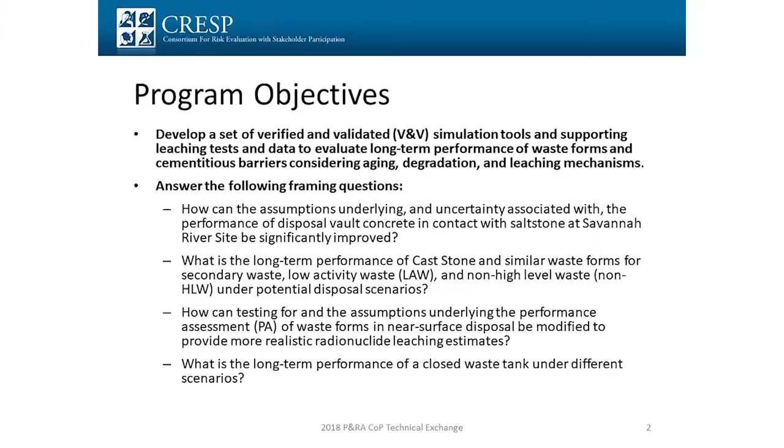How can you test for and look at the underlying assumptions for PAs associated with waste forms in general for near surface disposal? And how can you make those release estimates more accurate? We've also taken a look at how you assess the closed waste tank and its performance over time under different scenarios. So we tried to frame it that way.

We've had a number of applications we've looked at over the years: the Hanford site, single shell tank waste integrity, Waste Management Area C, which was the first one they've pretty much retrieved the waste from, still working on one tank. And then the next one is AAX, so we're looking at that.

That will be more of a PA maintenance sort of idea, that and the IDF, which is under review for its performance assessment. Looking at how you characterize the source term for cast stone, selected for secondary waste at Hanford, also looking at it for low activity waste and non-high level waste. With the reinterpretation, you'll see the phrase non-high level waste, and that's related to the reinterpretation of high level waste and however that goes forward.

In situ grouting, dry storage of cesium and strontium capsules, we're looking at that in terms of gamma effects. At Savannah River, I mentioned the ongoing program with Kent Rosenberger looking at salt stone, so high salt waste in contact with the vault. How do you look at that as a PA maintenance, a special analysis sort of idea?

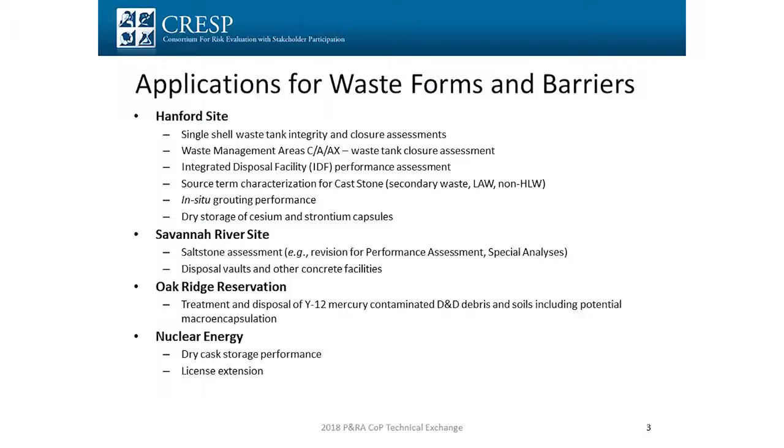So major activities range from the experimental to the modeling. I tend to do more of the modeling stuff, while David and others do more of the experimental.

We are looking at evaluating the impacts of oxidation and carbonation on these cementitious waste forms and how they perform over time, looking at the leaching chemistry, density, and saturation.

If you have something like a high salt waste, typically the way you'd measure porosity doesn't work because when you add water, the salts dissolve and you can't do porosity that way. So you have to approach it differently, and we've done a lot of work on that.

David had mentioned the work applying the LEAF methods to low activity waste glass. I won't touch on that today since he covered it well yesterday. And for things like dry cask storage, we look at the effect of long-term high gamma radiation on those materials.

On the modeling side, which is what I do more of, we're looking at how we close the software quality assurance gap that came up yesterday. Our methods grew out of a research environment, but when we apply these things to DOE work, we have to be consistent with 414-1D and NQA1, so we're working towards that.

As David mentioned, we've got the pH dependence models, 1313 and 1315. These models are already in SW 846, so they're being used actively for regulatory purposes. But how do we make sure our software quality assurance is consistent with DOE regulations?

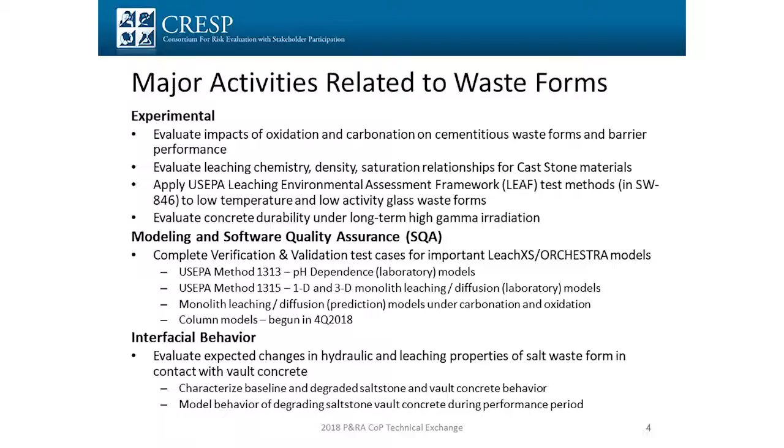Also, there's things like high salt waste at Savannah River in contact with vault concrete. People have done experiments where, over several years, these things were put in contact, and you're supposed to see sulfate attack, but you don't see it. So we're looking more at that interface and the effects of conditions on whether you actually get sulfate attack within the time frames we care about, as an ongoing program with Kent.

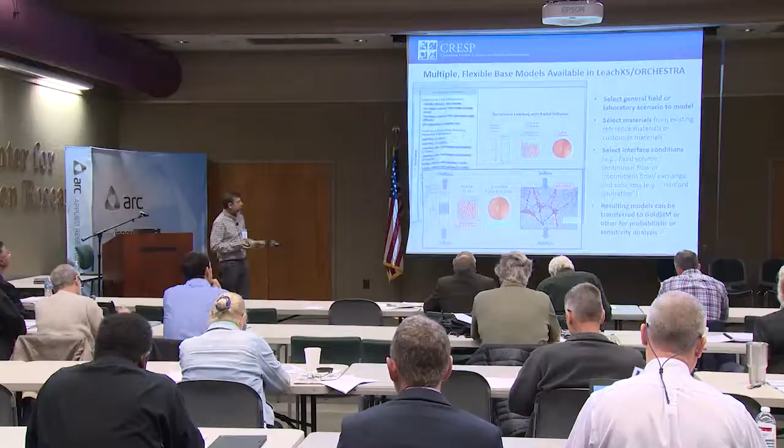So we have a series of models to describe the same test methods David talked about yesterday: 1313, which is pH dependence, and 1315, which is mass transport. You can change your field conditions, laboratory setting, and different materials. We've looked at several thousand materials in a database called LeachXS.

There's also an integrated geochemical model called Orchestra that I'll talk more about, which you can use to predict the same things you're seeing experimentally, changing the interface conditions and flow conditions.

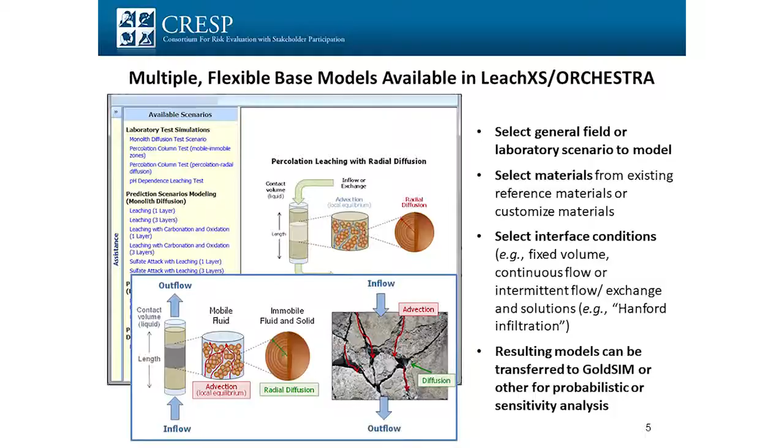We've done some work under what used to be called the Cementitious Barriers Partnership, where we transferred these models to GoldSim. Our students tend to use MATLAB more since they're more familiar with it, but we've used both MATLAB as a wrapper around these things for probabilistic work, as well as GoldSim.

In terms of the SQA, this has been painful—it's what I've been doing the last two years. We're making our models, test cases, and SQA consistent with NQA1 and 414-1D, the DOE quality assurance order. We've progressed from very simple calculations with analytical solutions all the way to code-to-code verifications or checks with things like PHREEQC.

There's a number of international benchmarking studies our codes have been compared to. This one, the reactive transport study, is looking at boom clay in Belgium for disposing of radioactive waste, and that's the same calculation we're using as one of our benchmarking studies and test cases.

We've also compared things to laboratory and field results, because we also talked to the NRC, and they asked what this means in reality. So we've tried to do a lot of work on that.

I did a case a few years back looking at the C107 dome core from Hanford, buried 65 years under 3 meters of dirt. They took a dome core, and I was able to predict—not calibrate, but predict—the level of carbonation in that dome, and it was very consistent with what they actually saw experimentally, so that was nice.

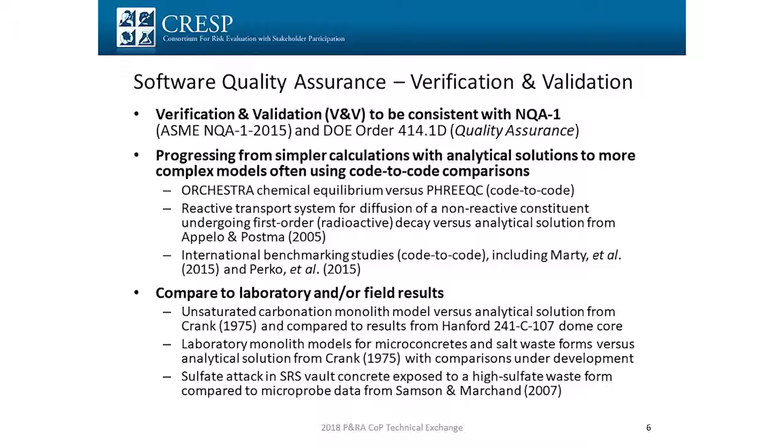We've done a lot of work looking at the monolith models and how these work, and we're still developing the comparisons there. We're just starting the column models now, and we've also looked at sulfate attack—the sulfate attack model used for Savannah River and their saltstone. The NRC raised a number of questions on that, so we're still working through some of those in terms of how the model is formulated and how you handle things stochastically. That's an ongoing project as well.

And I'll talk more about that later in terms of the work that we're doing with Kent.

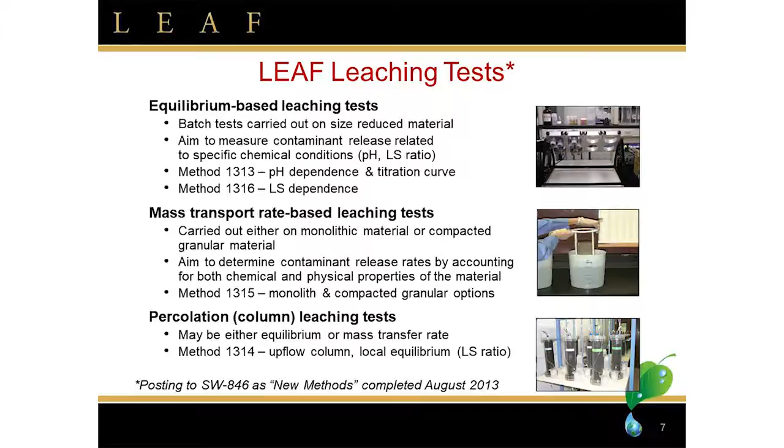So David touched on these already. There are 4 basic methods in SW 846, the EPA methods. You've got 1313, which is a pH dependence model, so release is a function of pH. You have 1316, which is release as a function of liquid to solid ratio. You have mass transport rate tests, and David talked about the 1315 test. Then you also have some percolation column leaching tests, which we're just engaged with doing the software quality assurance for those models now, where it's an upflow column looking at the local equilibrium and the liquid to solid ratio.

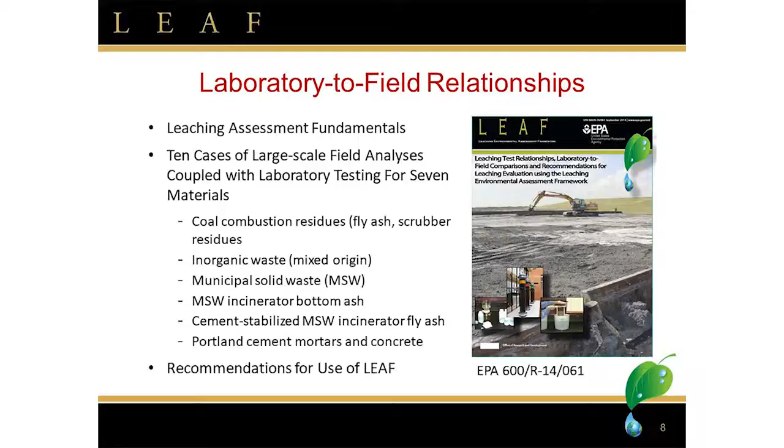So I'm going to get into some of the experimental work and some of the motivation of this. We've looked at a lot of effects of carbonation and oxidation on both vault concretes and high salt waste materials. This is because these sorts of things can affect not only the microstructure of the material, but the redox state and therefore some of the solubilities of key constituents. So we've been looking at that.

When I was looking at the tank closure scenario for a 65-year-old Hanford tank, I didn't really have to worry much about supplemental cementitious materials. But when you look at, say, vault concretes at Savannah River or IDF at Hanford, you're going to have to start worrying about supplemental materials. So what are the impacts of these on the alkalinity and some of the other effects that you're going to see?

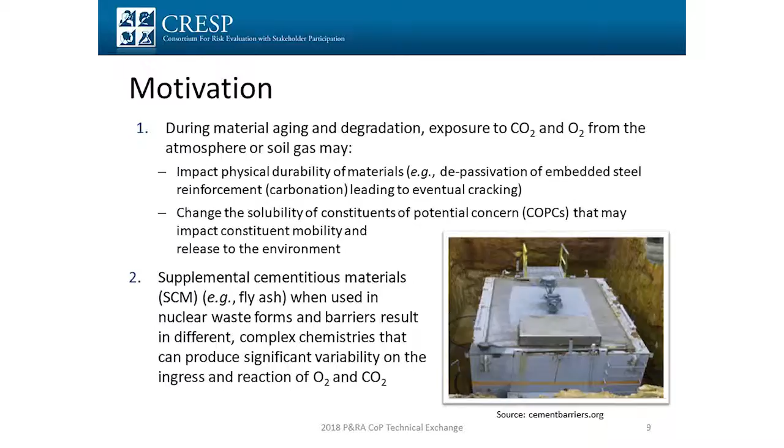So carbonation is recognized as one of the primary degradation or aging mechanisms for empty tanks at, say, Hanford. So it's important from that respect. There are a number of reactions that can happen as you get CO2 from the soil gas or from the atmosphere in contact with the concrete.

It can lead to changes in pH, which if you have a significant change in pH, say to pH 9, you can get depassivation of embedded rebar. That can lead to expansion, maybe even cracking. So it's something that could change the structural properties as well, the advective property, the flow properties of the material. It'll change the solubility of certain key constituents that you care about. Like I said, the microstructure can change.

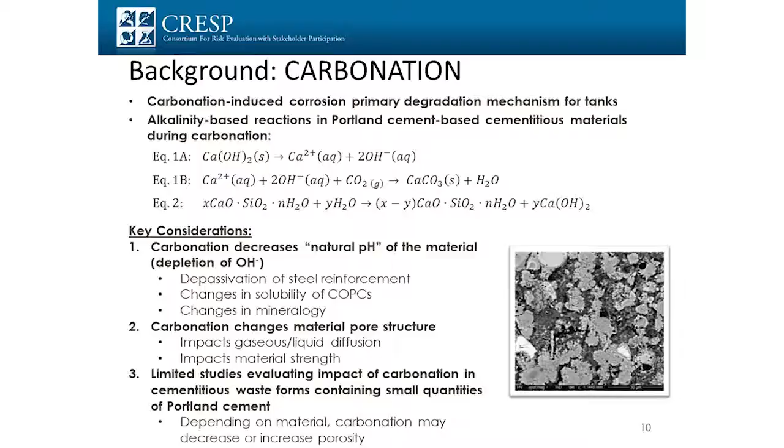There have been just limited studies on the impact of carbonation in these waste forms for small amounts of Portland cement, which is where people go. But these changes depend on the material. If you have something that is, say, Portlandite primarily, and you start carbonating it, you'll get a refinement of the pore structure. But if you have something like a geopolymer or something with ettringite in it, as you carbonate, you actually lead to expanding the pore structure. So it does depend on the material. It doesn't always close the pore structure. Sometimes it can open it up. So you have to be careful what kind of material you're looking at.

In terms of the oxidation, everybody in the room is familiar with what happens to technetium under these conditions. I'm not going to get into that very much. But in our work, because we try to limit the amount of rad material in our lab, we looked at putting chromium in as just kind of a redox sensitive species so we could kind of see how the fronts move. I'll talk more about this later.

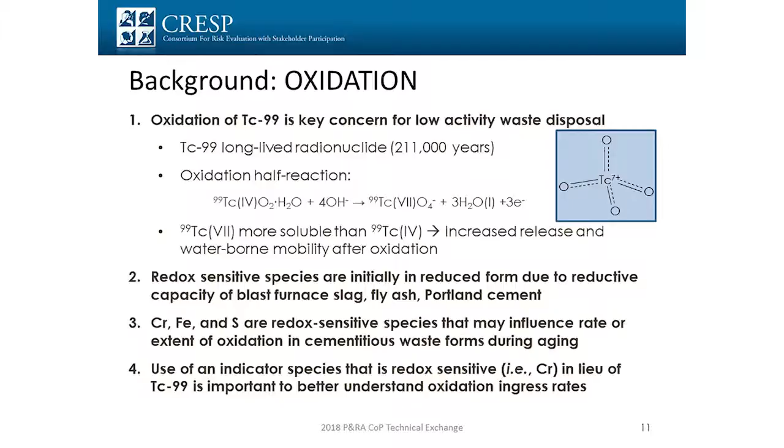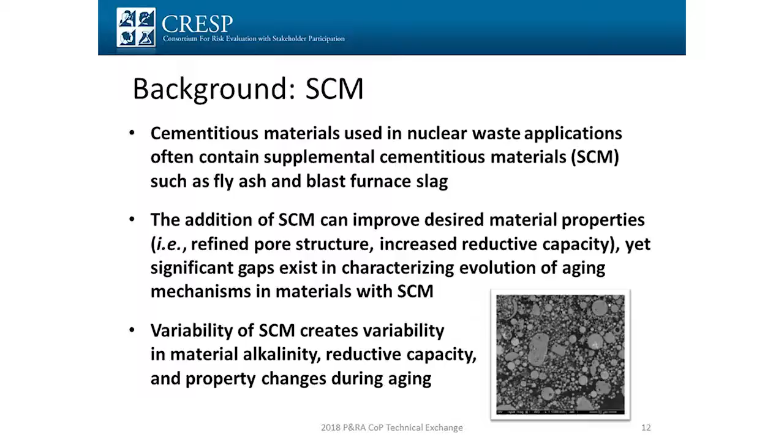In terms of supplemental cementitious materials, things like fly ash or blast furnace slag are often added to change the properties of the material. For example, if you want to increase the reductive capacity, you might add slag to affect things like keeping technetium in the material. This addition can be important for how oxidation and carbonation affect the material.

So we did a couple of experiments. I actually did a lot of experiments, but I'm going to talk about a couple of them. The first one is looking at the vault itself.

If you're looking at things like SEM, you really don't want the large aggregate in there, because it makes it hard to interpret anything. So we developed a series of what we call microconcretes, now called sieve concretes, where you take the surface area from the small and large aggregate and conserve that surface area. The leaching properties work about the same as if you still had the large aggregate in, so it's a good surrogate for a vault material for small-scale SEM and other analyses, which is what we're doing.

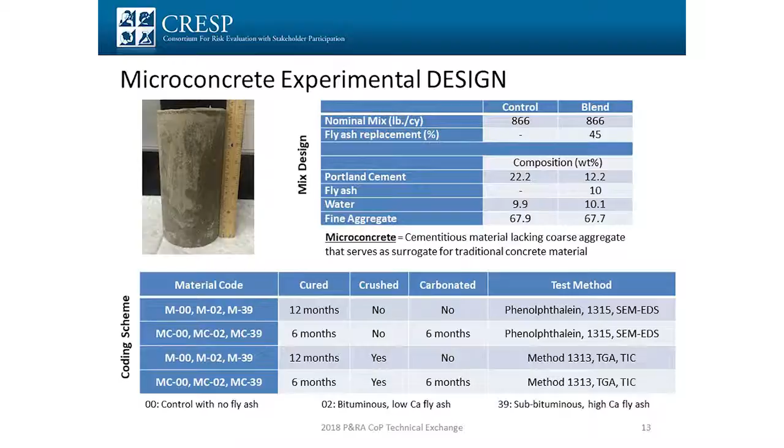This is looking at how fly ash replacement, 45% of the Portland cement being replaced by fly ash of various alkalinities, would affect the carbonation and oxidation of the material. These were aged initially for 6 months, then carbonated, oxidized, or put in an oxygen environment. We did carbonation only, oxidation only, and carbonation-oxidation combined as a series of studies. I'm just touching on a little of this, but it's all in her dissertation. We also looked at the alkalinity of the fly ash itself.

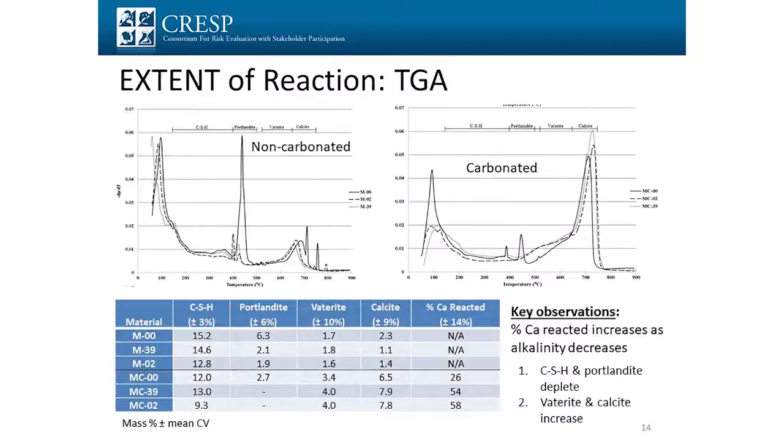There are some significant effects. If you carbonate the material, the CSH and Portlandite will deplete, and the vaterite and calcite will increase, which makes sense because you're carbonating the material. Vaterite is an analog for calcite. This is what you'd expect to see in something like a concrete, based on thermogravimetric analysis, and you can see some pretty profound effects from the carbonation.

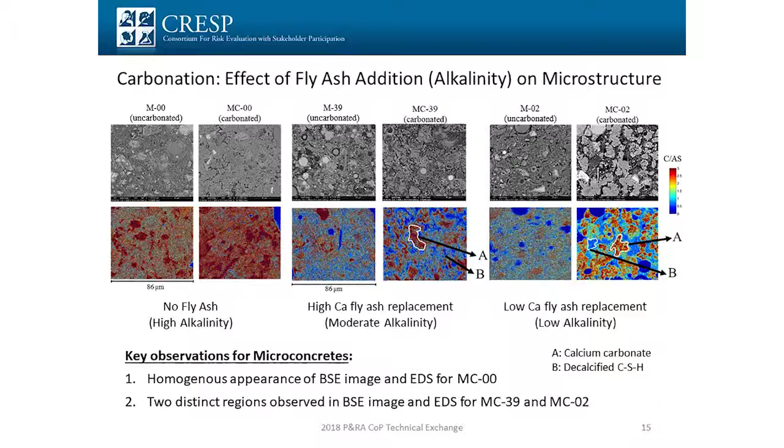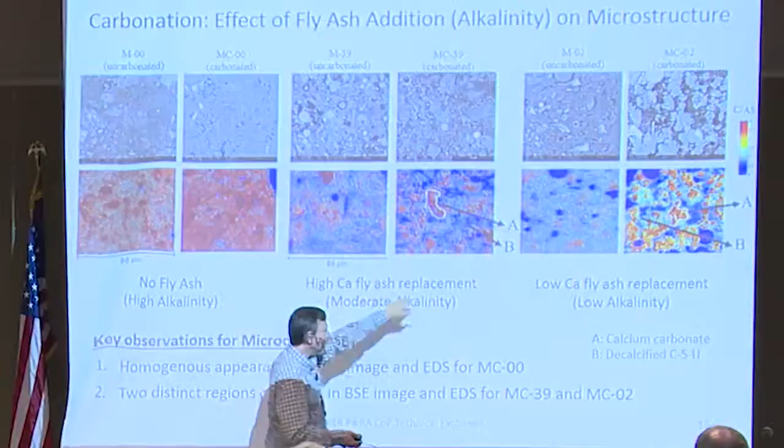People often talk about pore structure refinement when you carbonate something like a concrete, and you can actually see that here in these small-scale scans of the material, which show definite changes. The one on the left is uncarbonated, and to the right shows the effect of carbonation. The 00 is without any fly ash addition, just Portland cement. The 39 is the moderate alkalinity one, and the low calcium fly ash is the 02. So you see the effect of carbonation on pore structure refinement, but also an effect of how much alkalinity was in the fly ash itself. It depends on what material you're adding as to the response you get.

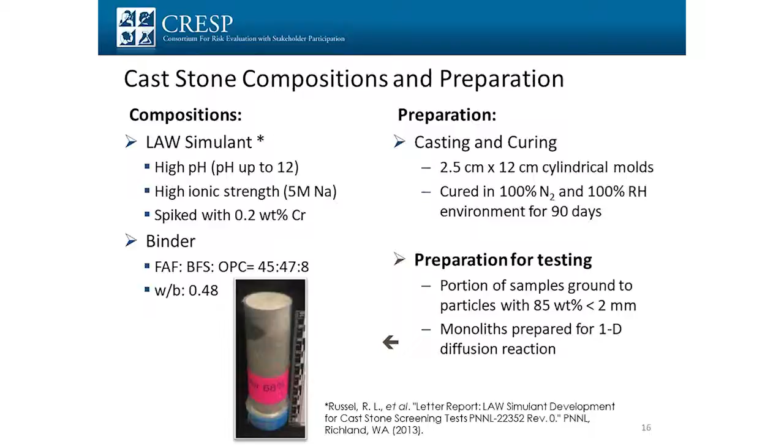We also looked a lot at the high salt waste form. We've looked at saltstone, but I'll talk about cast stone today since this is ongoing now. We're using the average LAW simulant for Hanford in these cast stones. We cure the material for 90 days and then prep it for both carbonation and oxidation, very similar to what we did with the microconcretes, to see the effect on the cast stone materials.

So again, aging 60 days, looking at doing thermogravimetric analysis, the 1313 pH-dependent test, XRD, total inorganic carbon. We're doing SEM on these, and monolith testing for mass transport. So we're doing a suite of tests to try to characterize the behavior of these materials and the effects of carbonation and oxidation.

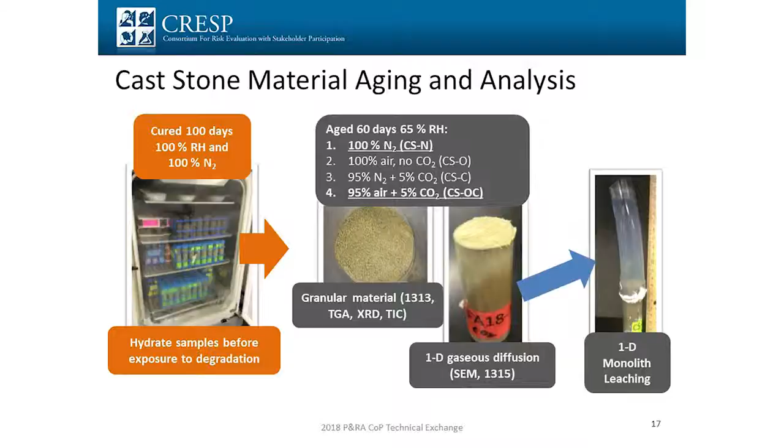We also looked at the relative or saturation effects on these materials. This is the second series of tests where we're looking at carbonation and oxidation, and also how saturation affects these materials, because these high salt wastes really want to soak up water, but as reactions occur they also produce water, so you have to keep track of the water. A place like Savannah River is pretty much saturated, while a place like Hanford is not saturated, so they're very different environments. We're extending what we did for saltstone to the cast stone materials as well.

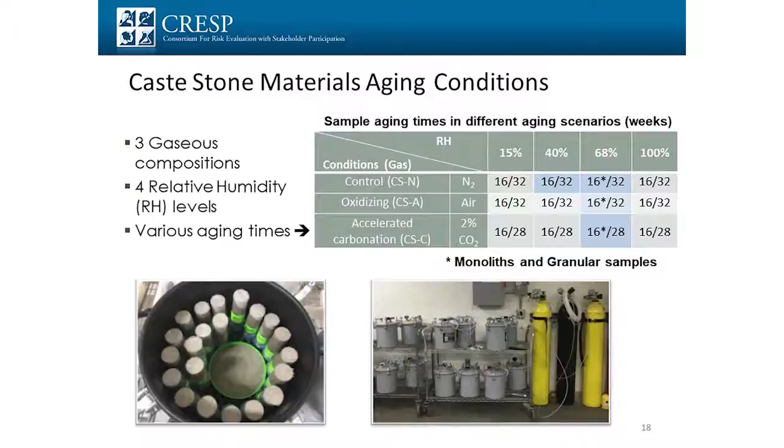The next two plots, I may have accused the student of making this data up because the variability, the uncertainty, is so small it was hard to believe.

This one is looking at the effect of relative humidity on the depth of carbonation. You can see a fairly linear effect with square root of time. The literature says it should be proportional to the square root of time, and it looks pretty proportional. A statistician would say a line is two points and an opinion, but those are still pretty good.

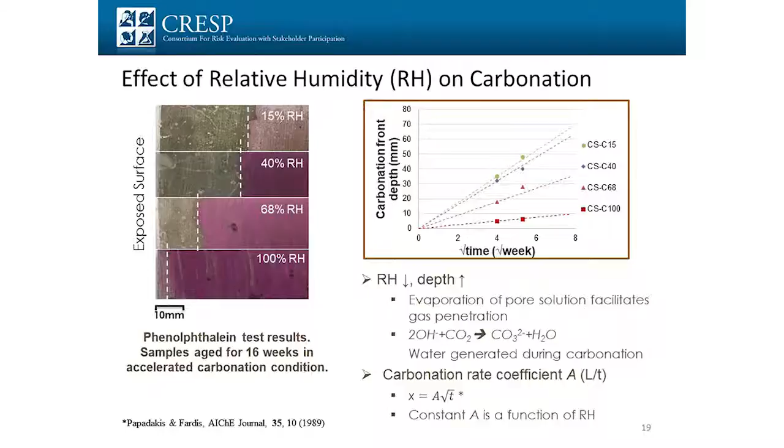So we see a very strong effect that agrees with the literature, which says it should be proportional to the square root of time.

We also looked at the effect of how much carbon dioxide you have in the test chamber you're curing it with, on the rate of carbonation, and you can see this apparent linear relationship.

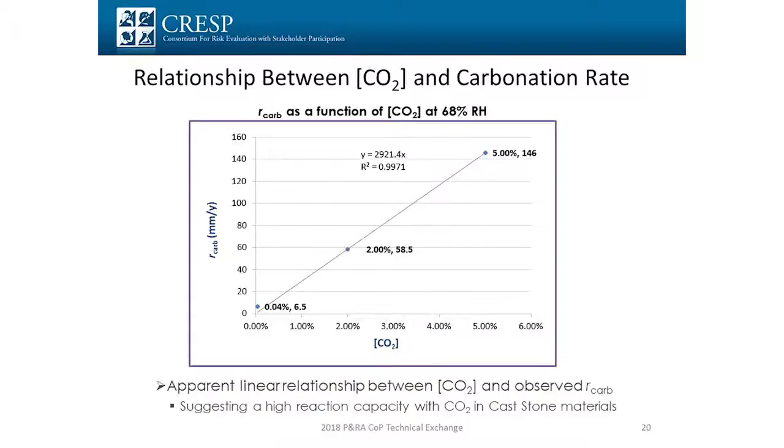This is one I actually said she probably made up, but I guess she didn't, because the rest of the data points fall right on the line. Those data are almost hard to believe. So you see this apparent linear relationship between the carbon dioxide level and the rate of carbonation.

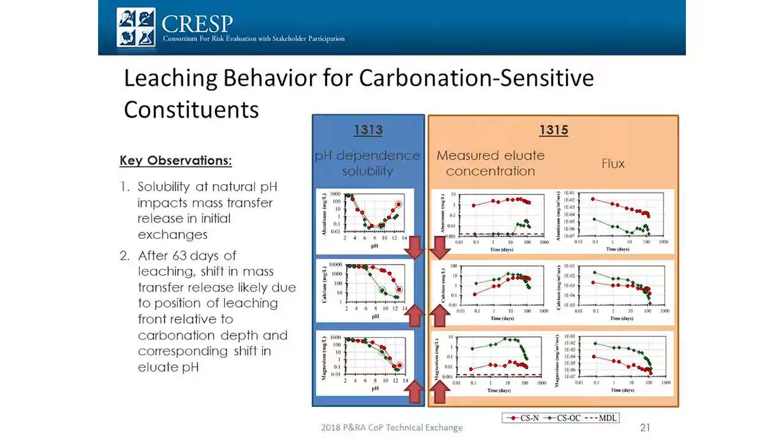For oxidation-sensitive species, in this case chromium and iron, you'll see again an effect on the natural pH, which affects the initial mass transfer release. After 21 days you'll see a shift in the mass transfer, again due to the relative position of the oxidation front to the leaching front.

The shift seen in the mass transfer during early releases is, we suggest, due to the oxidation front moving more slowly than the carbonation front in these materials. So the fronts don't move at the same rate. Even though you'd think the oxygen and carbon dioxide are moving into the material at the same rate since it's unsaturated, you'll see the effects actually propagate through the material at different rates, so the fronts move differently.

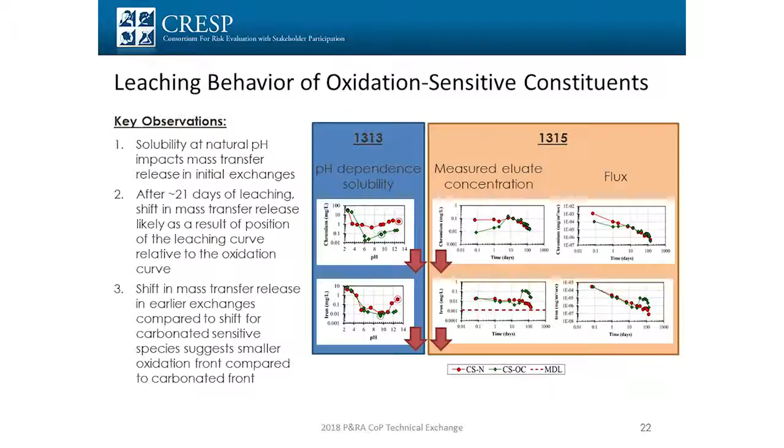I only have one slide on this. We've been doing a lot of work with Kent over the year to support the revision to the SDF, the Saltstone Disposal Facility, PA, at Savannah River.

Originally they assumed you have a vault with CO2 from the soil gas on the outside carbonating the material, and salt waste on the inside with sulfate attacking the material. At some point those fronts cross, and the material then becomes, I shouldn't say magically, just like the backfill soil in terms of hydraulic conductivity. It's a fairly bounding assumption. I won't say conservative because David Esh is here, but I'll say a bounding assumption.

So how do you look at the hydraulic conductivity of the intact versus the degraded material? There was an initial assumption of two bounding cases: you either assume flow parallel to it or perpendicular to it.

If you go to the literature, and Craig Benson at Virginia helped me look at this, doing a weighted geometric mean of the two based on the uncertainty in your hydraulic conductivities gives a much better representation of intact versus degraded material than either of those bounding conditions. This is something I at least hope, I've been told, will go into the PA.

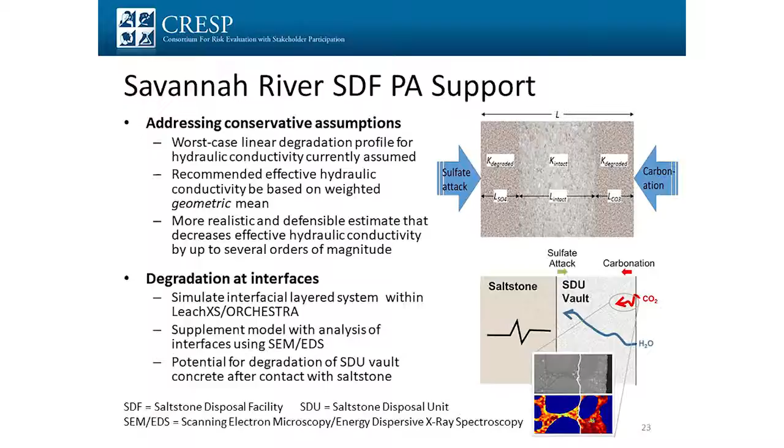We're also looking at the interfaces. There was a former series of tests done at SIMCO Technologies where they put saltstone in contact with vault concrete for, I think, at least 2 years. They looked at it even on SEM and could not find any sulfate attack.

So we're doing a series of tests looking at this as well. Andy Garrabrants at Vanderbilt is heading this one, where we're doing a similar study looking at not only do you see the sulfate attack, but what are the reasons if you're not seeing it? Because that would be very important to PAs in the future, at least salt in high salt waste in contact with vaults.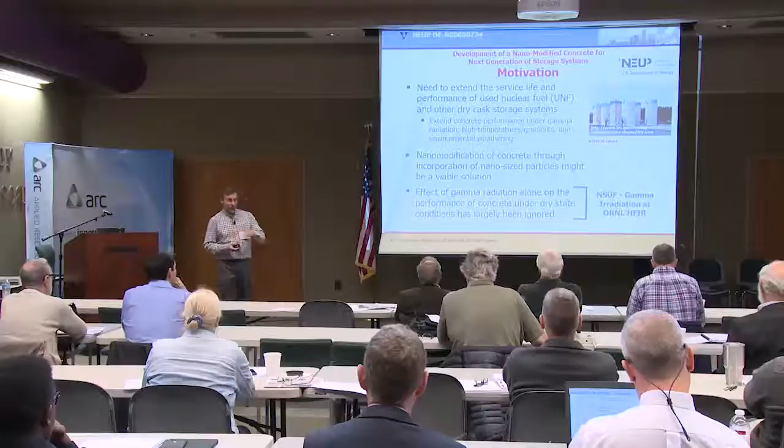The last thing I want to talk about, this is kind of new to this group. I know some of you have heard the other stuff I've talked about. In terms of dry cask storage for things like, hopefully most people are familiar with the TMI2 dry casks at Idaho. They had some issues with those. So we're looking at how do you improve the performance of the cementitious materials you might put in things like dry cask storage. One of the effects you might see is the high gamma, depending on what you put in these, coming off the waste itself.

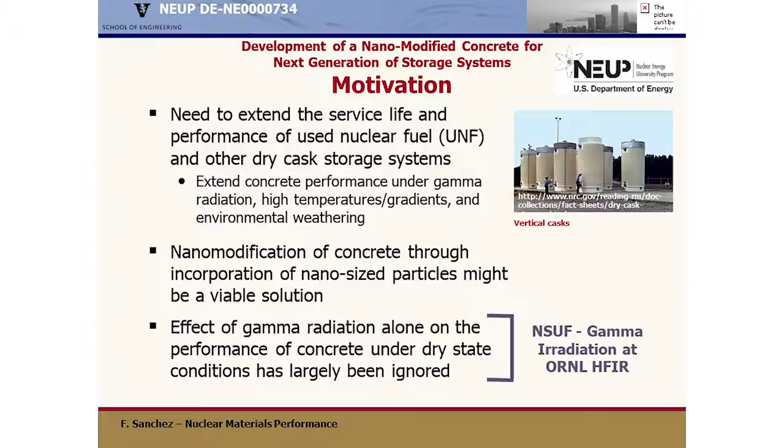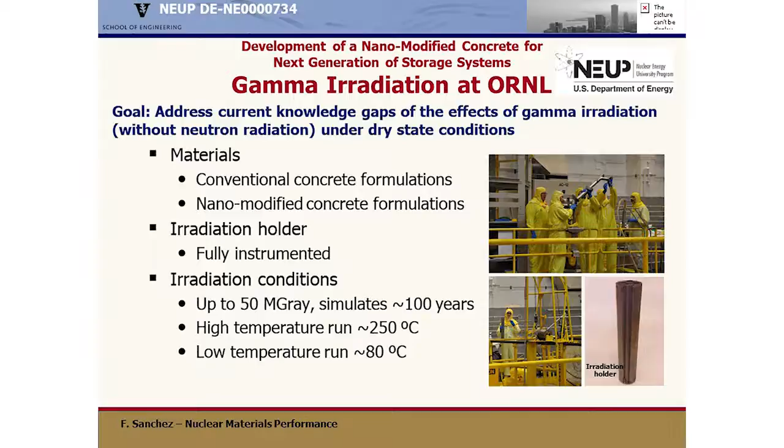So what's the effect of that high gamma on concrete? We have a tremendous amount of information on what neutrons do, because reactor vessels have lots of concrete in them and they get hit with lots of neutrons, so you know what that does. But how do you look at the gamma effect? So we took some material, went out to Oak Ridge for the high flux isotope reactor and hit it with gamma, representing, say, up to 100 years of impact on the concrete itself to see what the effects might be, both also as a function of temperature. So we have these data, and we're in the process of analyzing these.

This is Professor Florence Sanchez at Vanderbilt who's working through this. And so we're doing a series of tests on these and looking at how the gamma might affect the concrete and how to improve, say, the performance. This work is geared at putting nanomaterials into concretes to help improve their performance, and this is one of the ways we're looking to see what the effect of that would be.

So I am done. Right on time. Any questions? Thank you.

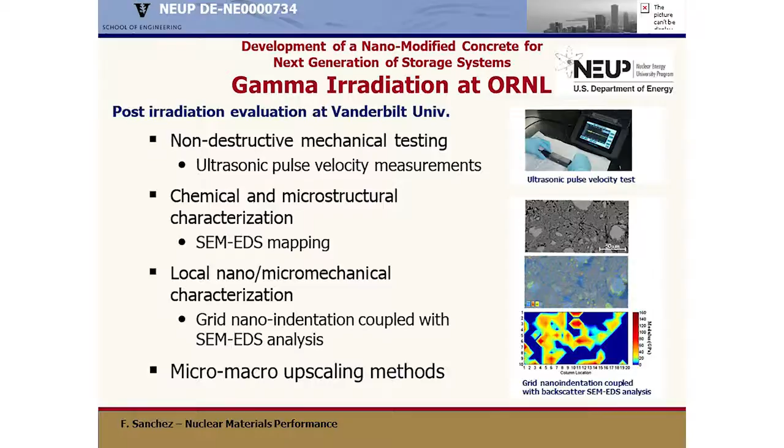Thanks, Kevin. I have one question, one comment. So a question first. Did you, maybe I didn't get it or maybe you aren't there yet, did you see any synergisms or antagonisms associated with combining two processes, i.e. the carbonation and the oxidation at the same time in terms of the waste release?

You don't see too much of that, but one of the things that came up is just what you're talking about, because I know you and I have had these discussions in the past, as I've had with students, that first it was just going to be oxidation and carbonation. I'm like, well, that doesn't work, we have to have both in there as well, which, you know, the researcher doesn't like because it's more work. How do you isolate these and look at the synergies? We haven't seen too much of that, but it's an ongoing process.

Because with the microconcretes, things happen less quickly. So I think on the vault side, you're not going to see too much. Things like a 60% porosity cast stone or salt stone, you see a little more of it. But again, then you're much more worried about the oxidation effect than you are on the carbonation effect, because you're not going to see a whole lot of carbonation on those. But we kind of did it so we could understand the basic mechanisms of that. But it's a good question.

And then my comment is I'm very encouraged to see this, because if there's one area of the performance assessments where I think you can get a lot more performance out of it, or maybe in rare cases lesser performance, it's in the area of the waste form and the material science. Everything going on inside of that area of the problems is probably understudied or underutilized is the way I would describe it.